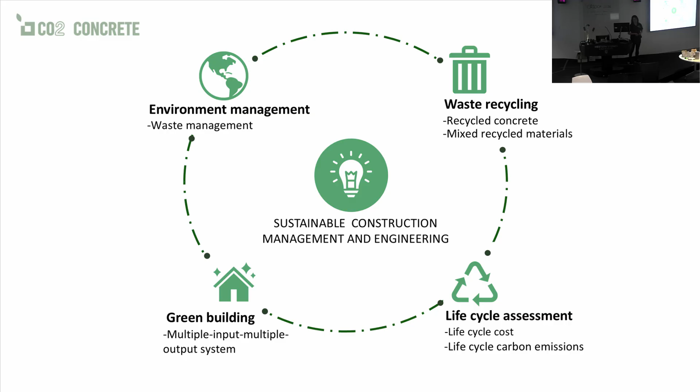My overall research is in the middle one, sustainable construction management and engineering. Today, I want to talk specifically about concrete. Hopefully, we bring low carbon concrete and recycled aggregate together. Low carbon concrete is a common term that the majority of concreters or concrete experts will know well. In simple terms, low carbon concrete mostly means reducing the cement quantities, meaning we're using cement substitute materials.

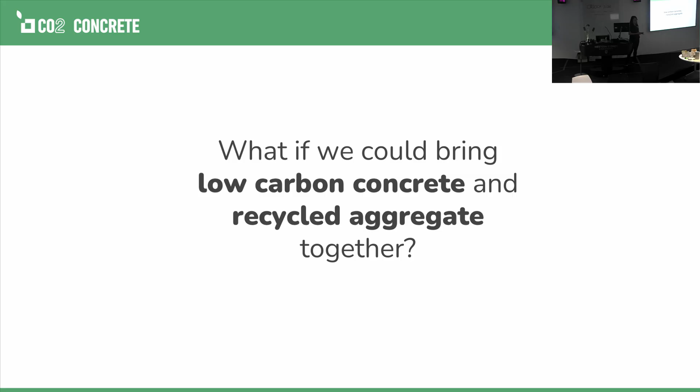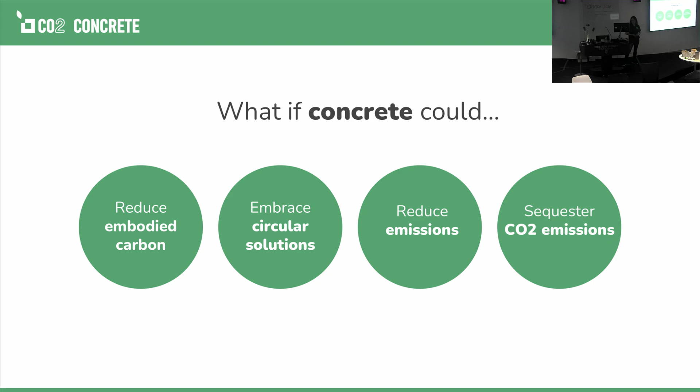But what if we're also looking into the majority of the volume component, because aggregate occupies more than 80% of the volume? And what if we bring these two together? What if concrete could also reduce the embodied carbon, embrace circular solutions, reduce emissions, and permanently sequester the carbon emissions as well?

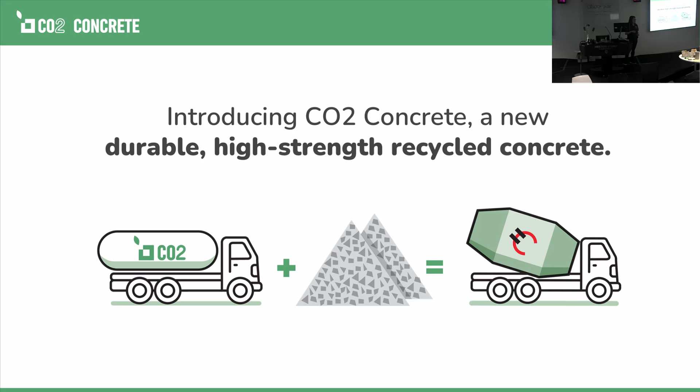That's why I want to introduce CO2 concrete here. CO2 concrete is a new durable high-strength recycled concrete. We have invented CO2 concrete as a new process. What we do is inject carbon dioxide into the recycled aggregate to improve its bonding and the overall performance of the recycled concrete.

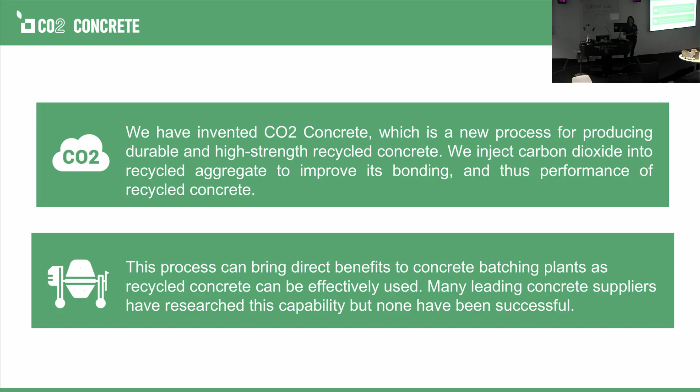Here you can see that it's one solution bringing endless benefits. We bring the circular perspective. Not only one circle of recycling; circular means you recycle and recycle again, turning waste into valuable materials continuously. Obviously, we are reducing carbon by permanently capturing and storing the carbon emissions in the concrete. And we're not only improving recyclability, but also adding value by upcycling the waste. Not classifying waste as waste, we bring the waste to its best value.

I have a 90 second video that we created under the Holcim Accelerator program. I want to share with you what CO2 concrete is.

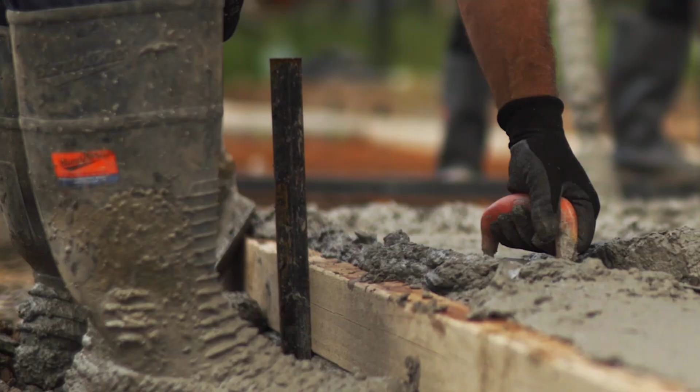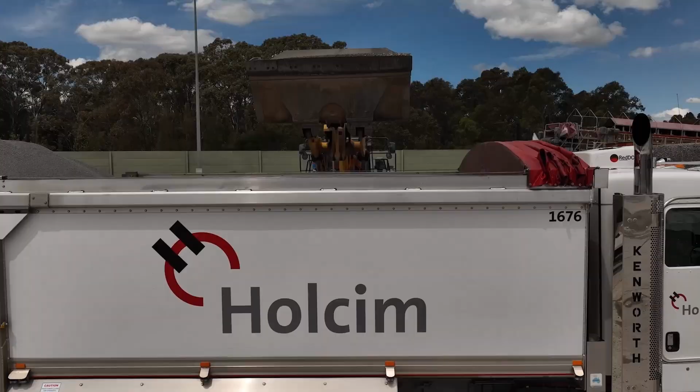The world is in a race to reduce the amount of human-induced carbon being emitted into the atmosphere. One of the biggest emitters of carbon is concrete. After water, concrete is the most widely used substance on the planet. In just the time it took to get to this point of the video, 19,000 bathtubs of concrete have been poured. Traditionally, when a building is demolished, the old concrete is never repurposed, making its way to landfill. What if there was a way of not only recycling the concrete, but also using the concrete as a vehicle to capture and store carbon created during the manufacturing process?

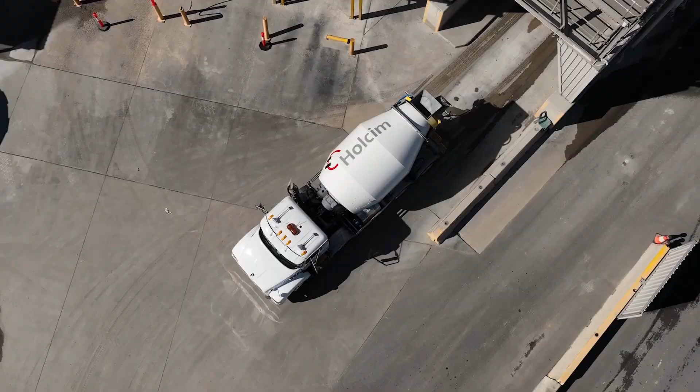Introducing CO2 concrete, a revolutionary new durable high-strength carbon capture concrete that uses recycled aggregates in conjunction with low-carbon concrete. These treated recycled aggregates are fed into a chamber where they are injected with CO2, which not only improves the quality of the aggregate, but also its performance. The CO2 treated aggregates are then taken to a concrete plant to be used in the final concrete mix. The result is a more sustainable building with a reduced carbon footprint. This is a truly circular economy solution that turns construction waste into recycled materials without compromising performance. CO2 concrete.

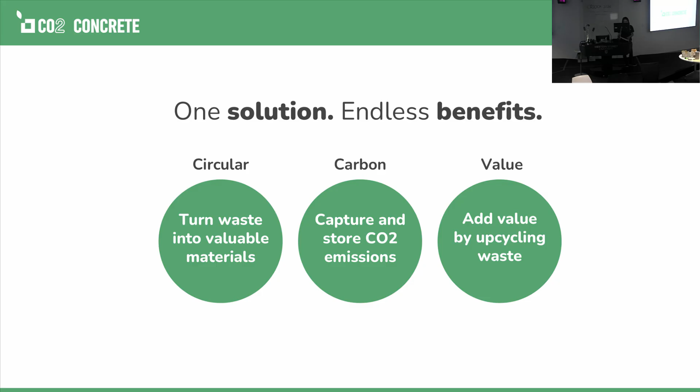Okay, that's a short introduction to what CO2 concrete is. I also want to acknowledge the Holcim Accelerator program that is helping us develop this.

Here you can see I showed a little bit of technical information. This is virgin concrete, and this is the percentage of CO2 aggregate injected, up to 100% CO2 concrete. If we purely replace virgin aggregate with recycled aggregate, the strength actually goes down by about 30%. But if we inject carbon dioxide into the recycled aggregate, the strength is similar to the virgin concrete performance. Not only is the strength matching, but also the cost.

In one similar calculation, it is roughly about $300 per cubic meter with virgin concrete. Recycled aggregate is lower priced than virgin concrete. The cost did go down, but the strength also went down, which limits its applications. When we inject carbon dioxide, the cost increases a little bit, but it's still about a 10% cost reduction compared to virgin concrete.

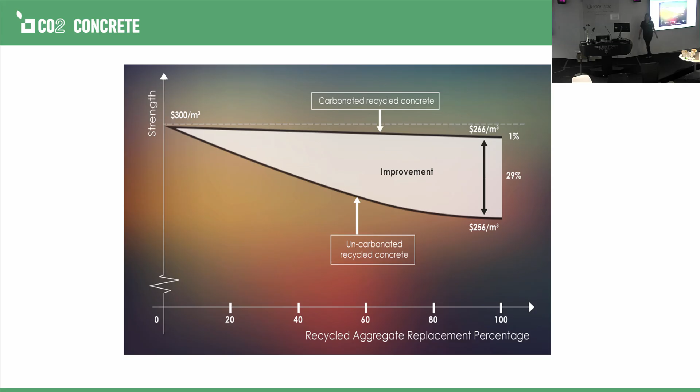This research has been done in the laboratory over the last 10 years. In recent years we have attended different accelerator and commercialization programs, and we previously did a few pours within the university. We are very glad that in 2022, we were selected as the Australian winner under the Holcim Accelerator program. And that's why we had the first mission.

Everyone was saying that we had to put the concrete outside the university. That's one of the 3 missions under the Holcim Accelerator program, to do a commercial pour. And we made it. In October 2022, we managed to have the first commercial pour at Blacktown Animal Rehoming Centre. I have the real concrete that we poured on the day here as well. It's the first one.

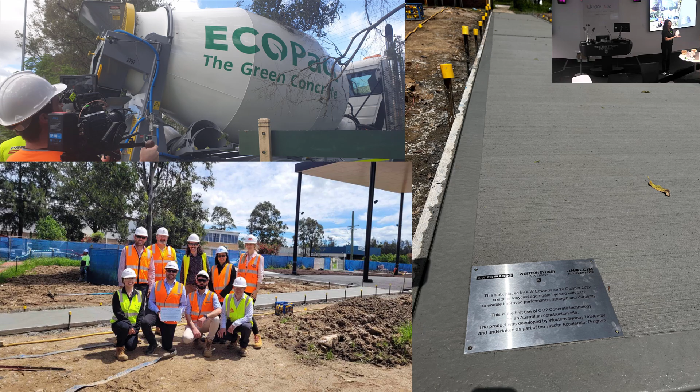And after 1 year, although the program was done in 2022, the relationship hasn't finished. We continue to try to put out the second slab as well. And just to go back a little bit, the last pour we did there was a 40% replacement ratio, because the international standard is 30%. That's why the last one pushed to 40, and this one will push to 50%.

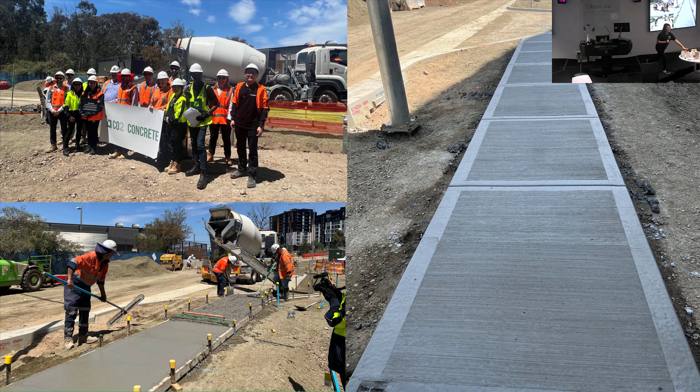And it is at the Edmondson Park North Commuter Car Park. It's under a similar partnership with Holcim. And these are our slabs, and the middle one is our real concrete made at Edmondson Park as well.

And the third one: after 2 commercial pours that we both did in New South Wales, we had John Holland come and say, hey, how about let's try outside New South Wales? I said, why not? And we have the relationship, and again, because the last 2 pours were already 40 and 50%, we have to push it higher. Otherwise, there's no point for me to keep the same ratio.

And we managed to break through a few challenges. It's really challenging to break through the percentage. As you can imagine, the international standard is only 30%, and we pushed it to 40, 50 already. And now we want to push it to 60. After multiple tests and multiple discussions and different kinds of argument, we managed to make it to 60% in Victoria, at the Maidstone Tram Maintenance Facility in March last year.

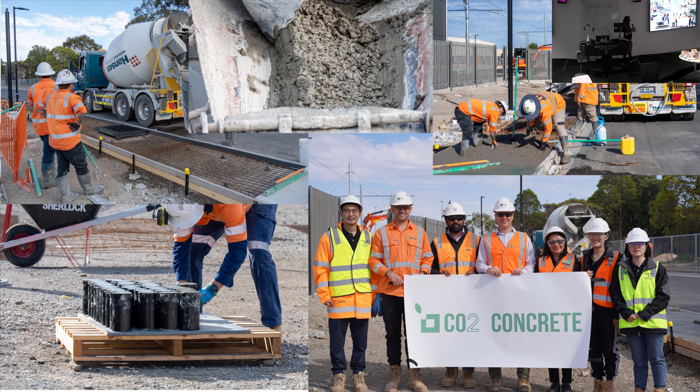And this is what we have. And we also poured some cylinders and brought them back from Melbourne to Sydney to do some further tests. And the third one is in here. There's 1, 2, 3. Basically, you can come and touch it later. There's nothing different from any other concrete.

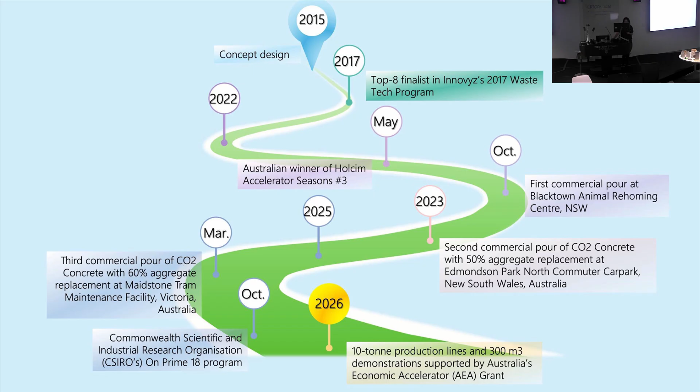And then we continued our research, and in 2022, as I mentioned, we were the Australian winner of the Holcim program, and we did 3 slabs. And last year we also joined the CSIRO ON Prime program as well. And we were awarded an AEA grant early this year. That's why we're really aiming to further accelerate and further develop as well. In here, I want to share a 2-minute journey video before I pass it to my partners.

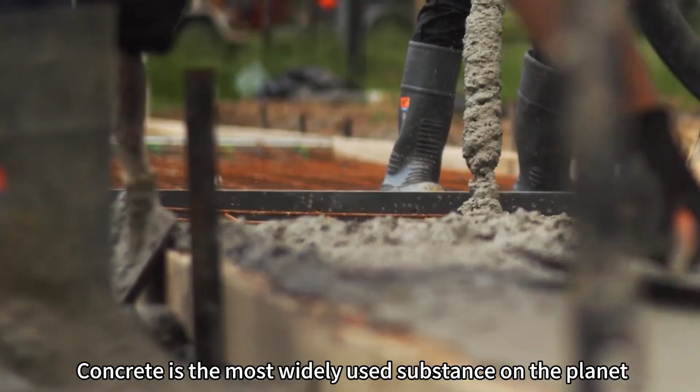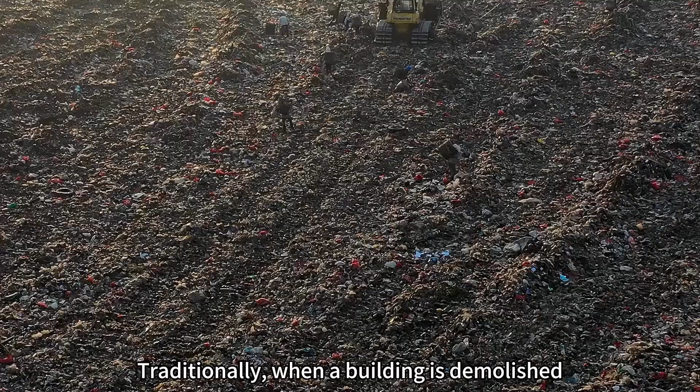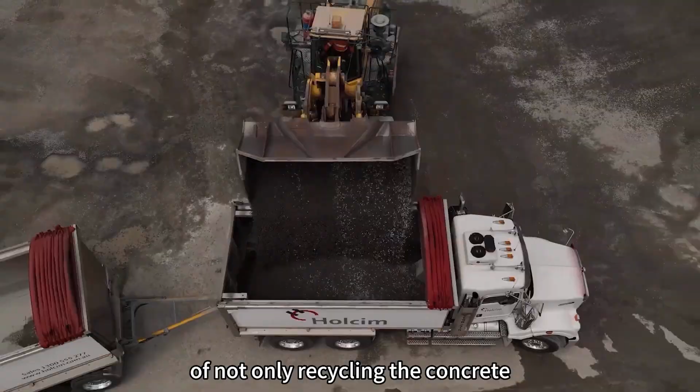The world is in a race to reduce the amount of human-induced carbon being emitted into the atmosphere. One of the biggest emitters of carbon is concrete. After water, concrete is the most widely used substance on the planet. In fact, every second, 19,000 bathtubs can be filled by the poured concrete globally. Traditionally, when a building is demolished, the old concrete is never repurposed, making its way to landfill. What if there was a way of not only recycling the concrete, but also using the concrete as a vehicle to capture and store carbon created during the manufacturing process?

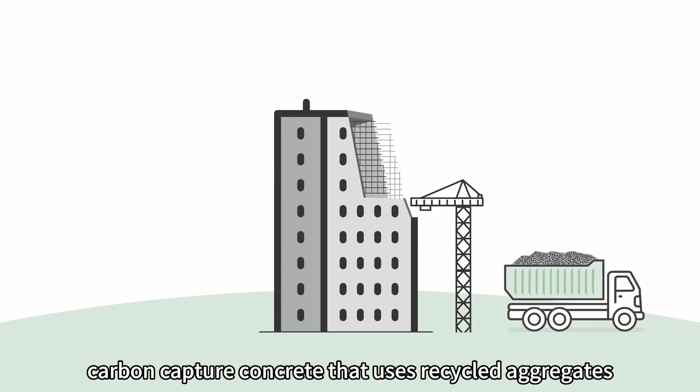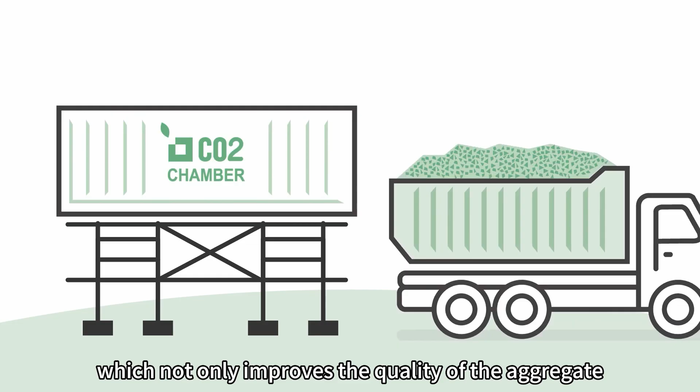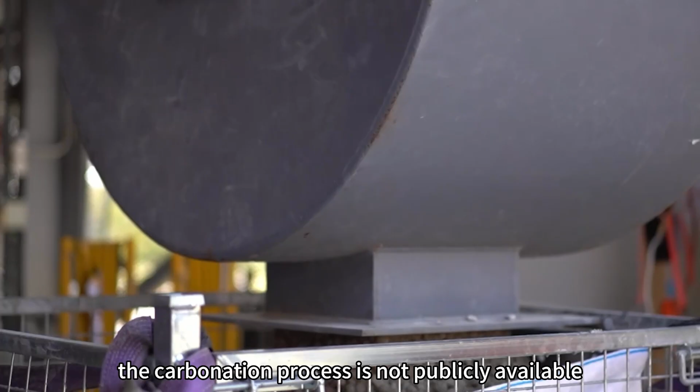Introducing CO2 Concrete. A revolutionary new, durable, high-strength carbon capture concrete that uses recycled aggregates in conjunction with low-carbon concrete. These treated recycled aggregates are fed into a chamber, where they are injected with CO2, which not only improves the quality of the aggregate, but also its performance. The CO2-treated aggregates are then taken to a concrete plant to be used in the final concrete mix. This is a circular economy solution that transforms construction waste into recyclable material without compromising performance. The carbonation process is not publicly available due to a confidentiality agreement.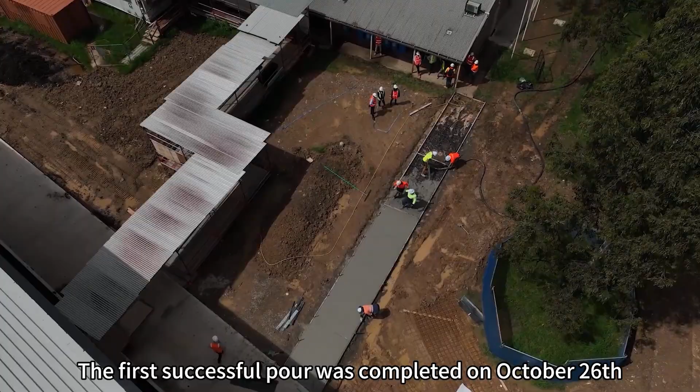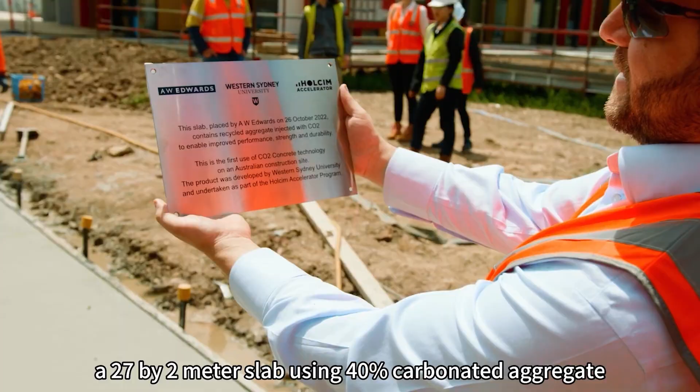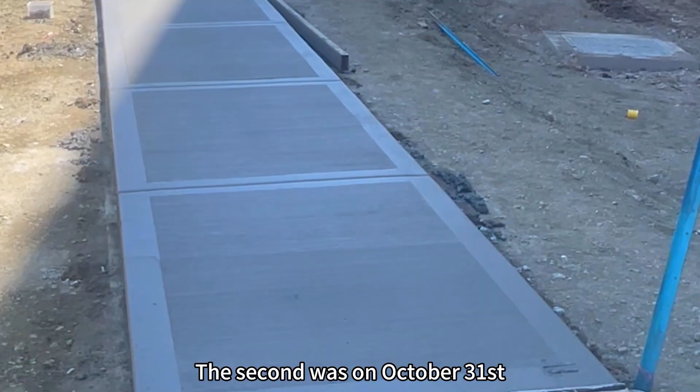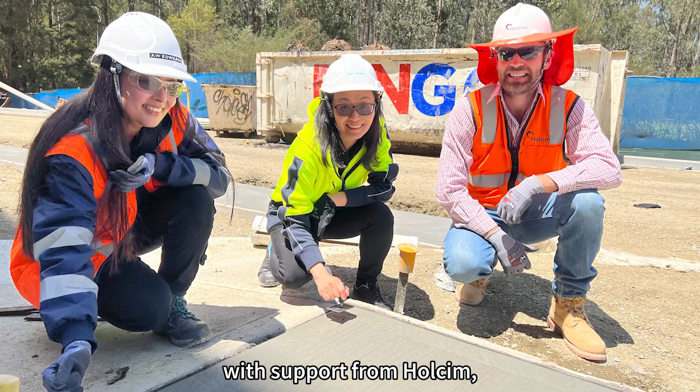The journey of CO2 Concrete has been marked by continuous progress and breakthrough innovation. The first successful pour was completed on October 26, 2022, at the Blacktown Animal Rehoming Centre in Sydney. A 27 by 2 metre slab, using 40% carbonated aggregate, the pour was carried out in partnership with Holcim, A.W. Edwards, Bouygues, Sika and Mark McDonald. The second was on October 31, 2023, at Edmondson Park North Commuter Car Park. A 25-metre pathway was poured with 50% carbonated aggregate with support from Holcim, A.W. Edwards, Transport for NSW, Liverpool City Council, and Western Sydney University.

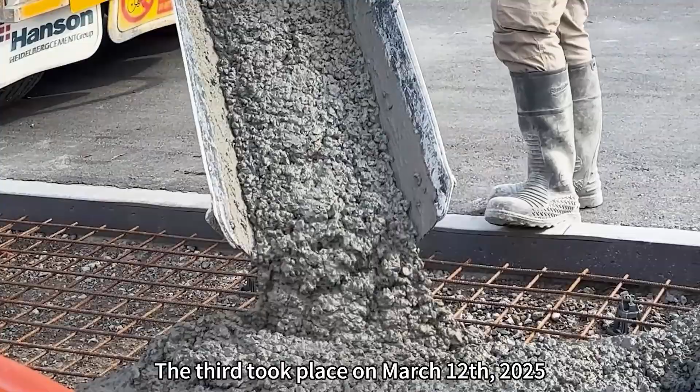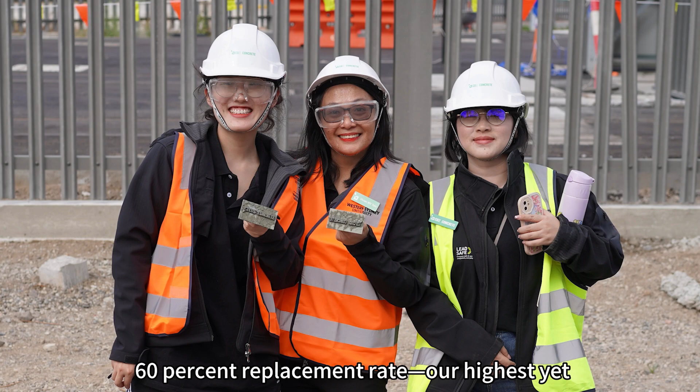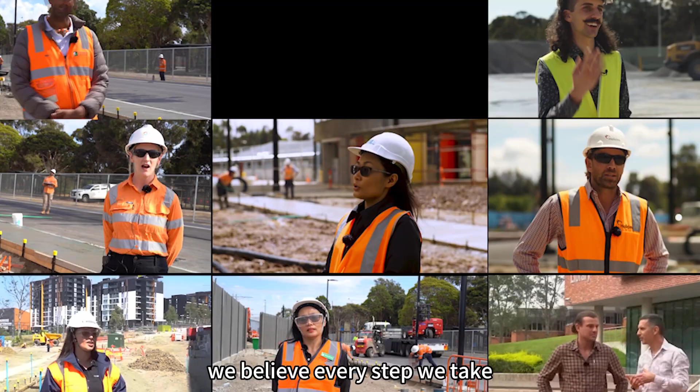The third took place on March 12, 2025, at Maidstone Tram Maintenance Facility in Victoria, in collaboration with Heidelberg Materials, Alex Fraser, and the North Western Program Alliance. This 25-metre pathway reached a 60% replacement rate, our highest yet. Each pour builds momentum, pushing CO2 Concrete closer to mainstream adoption. Looking ahead, we will continue to promote this product, working closely with government to ensure that the implementation of innovative solutions strengthens industry demand. With collective effort, we believe every step we take brings us closer to building a better and cleaner Australia.

Great. That's the journey that we have so far and the partnership that we have as well. And that is the end. I'll bring it back to the chair.

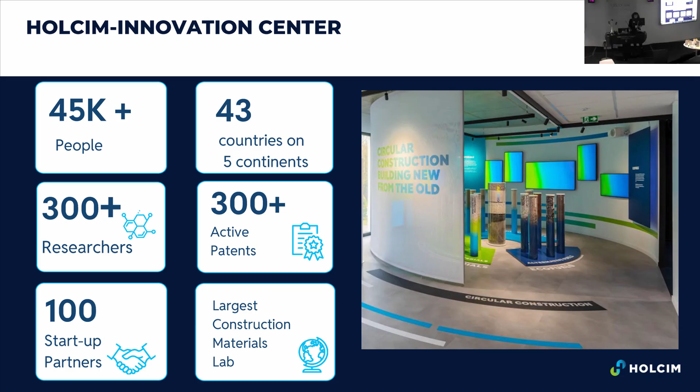So let's go through a little bit our journey about sustainability in Australia. Can you hear me? Our journey started in 2019. That was the first time that a concrete manufacturer had EPDs available for its products. So we were the first through EPD Australasia. And then in 2020, we also had the first process for EPD certification in Australia. That gives us the opportunity to offer EPDs on demand for projects that specifically need EPDs for the range of products used in any specific project. So that was almost 6 years ago now.

In 2021, our journey about low carbon solutions came on board, and we launched our global low carbon brand, EcoPact. I'm going to discuss a little further about EcoPact, but the next one developed was EcoPact Active. This is our high performance range when early strength requirements are necessary, and low shrinkage limits. So that is also available. In 2024 we also have the Global Green Tag Product Health Declaration that will help us to have a higher responsible value proposition.

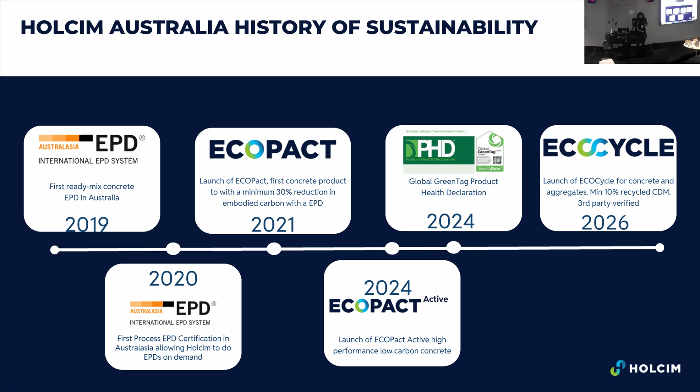And to give a little context, construction, as you know, represents more than, the numbers can vary, but more than 30%. I think it's a fair number of the total emissions. So we are responsible for more than 30% of the total emissions. Globally, obviously construction consumes a lot of building materials, so around 30%. Biodiversity loss, that is also something to consider. And unfortunately, just around 7% of the big number, more than 100 billion tons of raw material, are recycled.

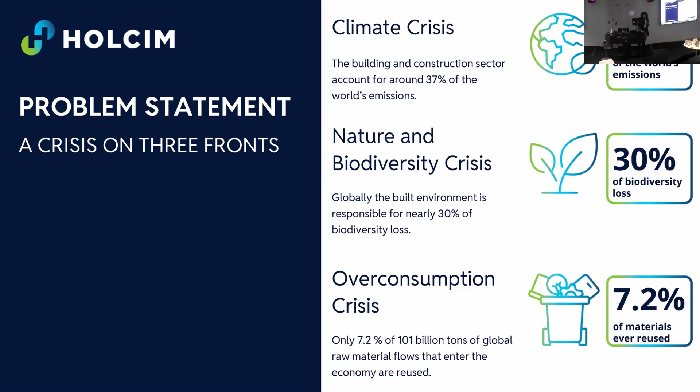This is the reason that some of the Holcim pillars are aligned to these 3 necessities. The first Holcim pillar is climate, and that is where our range of products tries to address some of the items that I mentioned before. In our product range, we have the low carbon solution EcoPact. We also have decorative products for some applications. We have Dynamax. We have products that align to these necessities,

and they are also validated by EPDs or supported by tests and evidence that they are going to assist this reduction. And then also, recently, we have FutureCast. This is our low carbon solution for precast applications as well.

But probably talking about concrete, and I think we are going to discuss much more about concrete. I would like to explain a little bit more what EcoPact is. It's a brand. As I mentioned before, we launched around 5 years ago in a small range, normal class, and this range is building as soon as the requests and the necessities come to us.

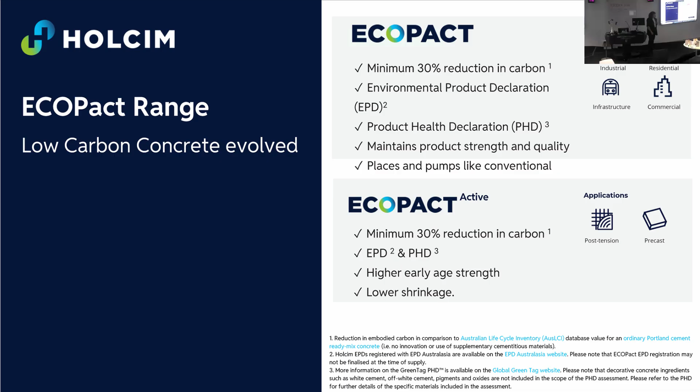Also aligned to low carbon, we need to think a little bit more about what else we can do. We also have a range of what we call digital solutions that help us address some of the challenges that all these initiatives are going to bring to our day to day, probably more for our customers and construction. Smart Flow is a system that gives us the chance to assess, model and reproduce how this mix is really going to pump on site.

Pumpability and rheology is one of the main challenges that we have been facing, probably with some high replacement or alternative materials. So we are able to predict, when we compare with different references, how this mix is going to perform in the field, exactly matching your setup: this is the pump, this is the number of elbows that you have. So this is Smart Flow. A very good solution to address some of the concerns that can come from our customers.

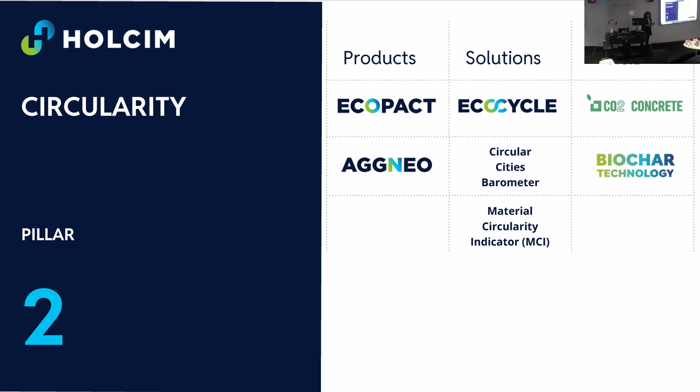As I mentioned, what is different about EcoCycle is that it is recycled material verified by a third party under international ISO 14021. It's validated to a minimum to be able to have this label: we have to have a minimum of 10% of construction and demolition materials in the product. That could be aggregate, but globally we also have cement and different products.

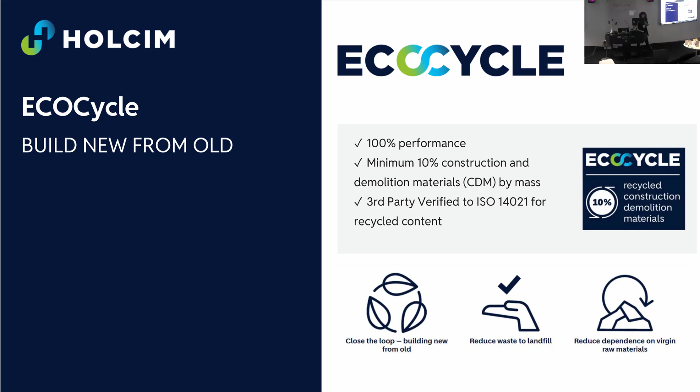The last pillar is nature and people, and again it is not only about product. In precast, our Humes division is doing very exciting initiatives with filters, systems that are able to capture the water from the soil and then filter it, and that is now available. In concrete, which is my area, Hydromedia is a product that is also available in-shore. It's a no fines concrete that ensures the water comes through the surface, because concrete is great, but we need permeable surfaces, in particular with the flooding issues we have been facing in the last few years. That solution is available as well.

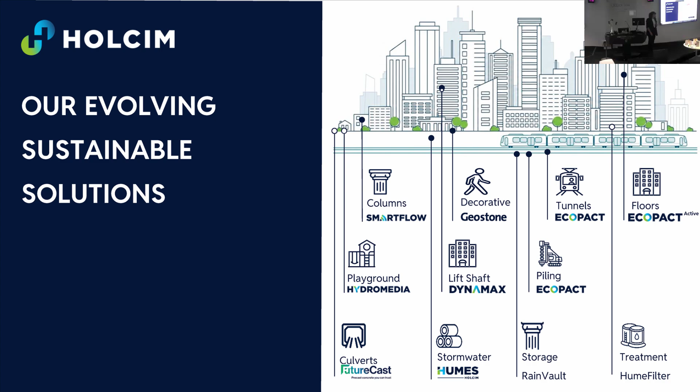So we are working on new initiatives, and it's great to be part of this journey. So just to recap, Holcim is leading all the sustainability initiatives happening in Australia, and we already have solutions for road base and basement applications, for infrastructure and buildings. And that is our journey, and it's really exciting to be part of that.

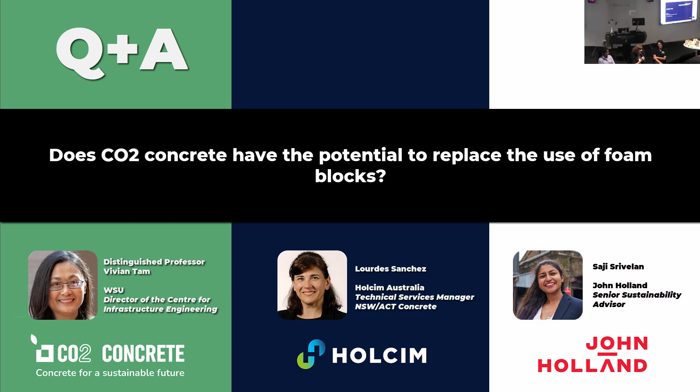That's why we're slowly moving it. We're slowly increasing the percentage and seeing how that concrete performs. We're also looking in terms of performance: from 25 MPa, we're targeting 40 MPa. We may also be looking at other applications, but slowly, because we understand that if the technology is moving way too fast, maybe we don't have enough time to react and reflect. That's why we try to move at a reasonable pace to ensure that progress and practice can be aligned as well. 100%. Yeah. Maybe the next pour is 100%.

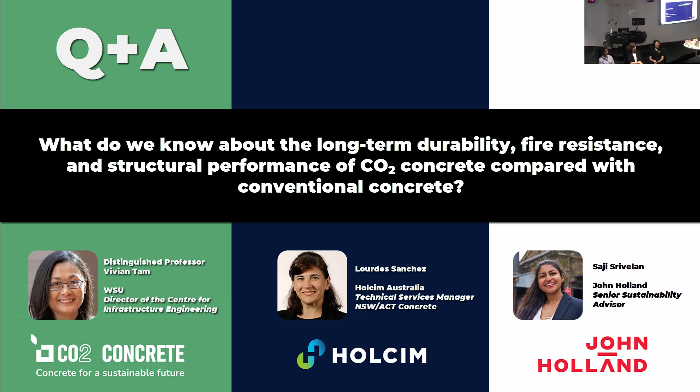And I just want to ask because I'm currently a PhD student, but before my research, I was working as a quantity engineer. So I'm really interested in whether it has potential to reduce the building cost. My first degree was in quantity surveying as well. That's why I'm very targeted in terms of how whatever innovation, whatever products that you need, have to have a bit of money figures, to reflect what my background is.

Yeah, well, from the concrete supplier point of view, I have to mention as well that depending on the application, it could probably not be exactly a cost reduction, because there are some challenges, there are some cementitious penalties if you want to meet the same performance. Sometimes we have to increase the binder content. I think that is going to be our limitation, because obviously if we're increasing cementitious, then we are going to increase embodied carbon. So we need to find the balance.